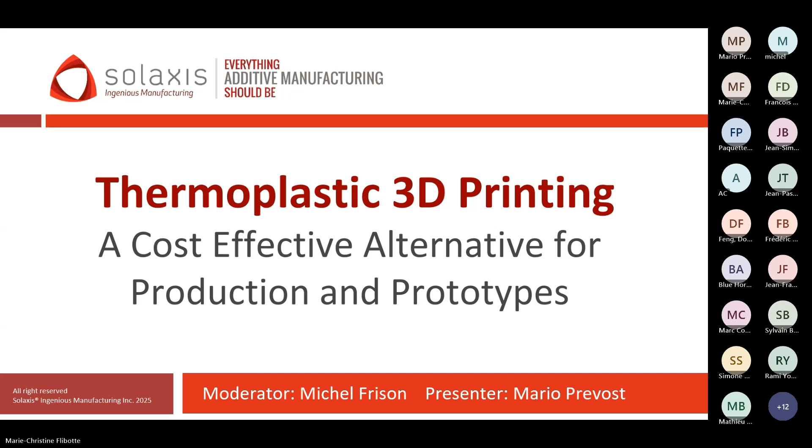Today, our aim is to provide you with a status of the industry and where technology is evolving. This first webinar will be very general, but future webinars will dig deeper into more targeted subjects. We are open to your suggestions for future events in the chat box on the right.

Today, our target will be the following: introduction of Solaxis manufacturing, the potential benefits of 3D printing, the state of the 3D printing industry in 2025, how to integrate and optimize 3D printing in your project, and at the end, we'll have a question period. Feel free to write your comments in the chat box and we will look at the questions at the end. Next slide.

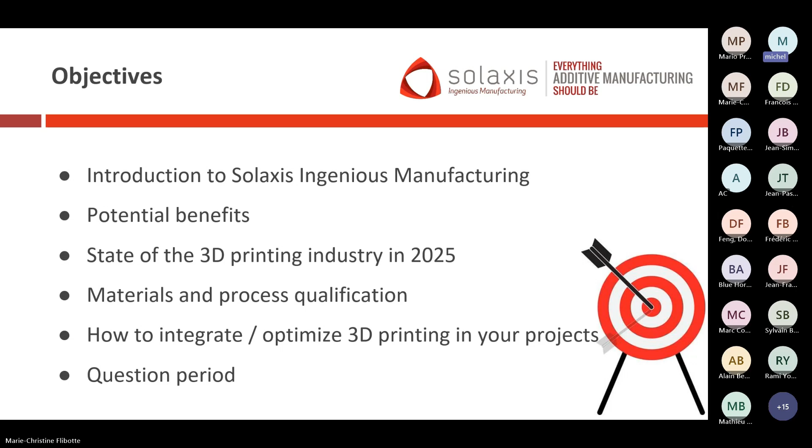Solaxis Ingenious Manufacturing was founded in 2010 and is located in Bromont, Quebec, about 1 hour south of Montreal. Solaxis is a leader in additive manufacturing of thermoplastic with worldwide industrial-grade technologies. Solaxis uses the following technologies for 3D printing: FDM, FFF, and high resolution SLS.

Solaxis is certified AS9100 and ISO 9001. We are also Controlled Goods Canada for our military projects, and CMMC. Solaxis works with various OEM and Tier 1 in the aerospace, medical, industrial, and transportation industries. Solaxis works with leading OEM, Tier 1 and 2 in many countries.

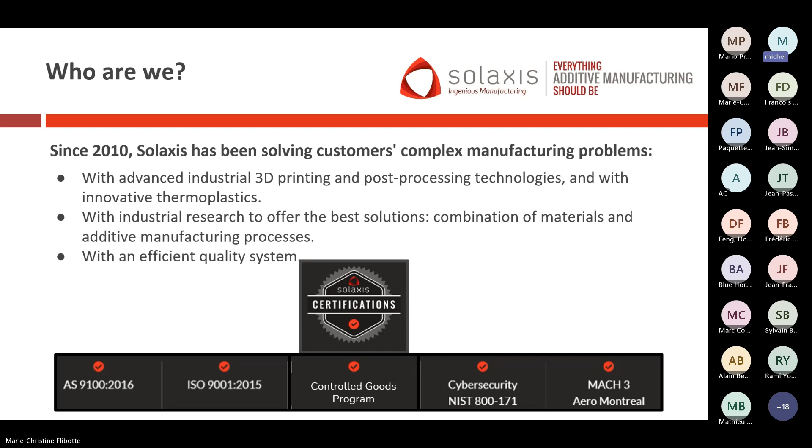Good morning, everyone. Thanks, Michel, for the intro. So today we're going to be talking about 3D printing. Basically, we're going to be tackling some different points about the envelope size, minimum, maximum, the volume, the type of material, lead time, tolerancing, and the benefits that can be brought with 3D printing.

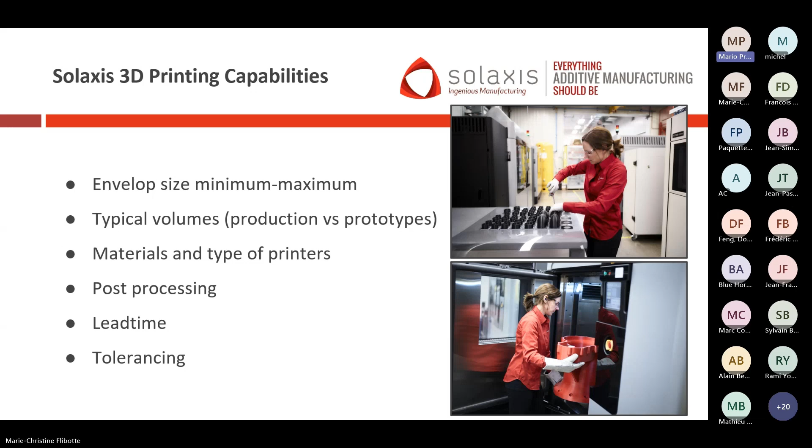So to start with, we're going to show you a quick overview of our shop floor. You can go to the other page. So that's just a quick image of the type of systems that we have. First of all, the FDM. We have several large format systems that go up to a 3 feet by 2 feet by 3 feet envelope.

Those types of machines have heated chambers, so they allow us to print parts with high-end materials such as Ultem and PEEK, and also a broad range of other materials with carbon fill and other fillers like glass fill. We can see in the image on the right side the finishing department and a portion of our painting room that we have here at Solaxis.

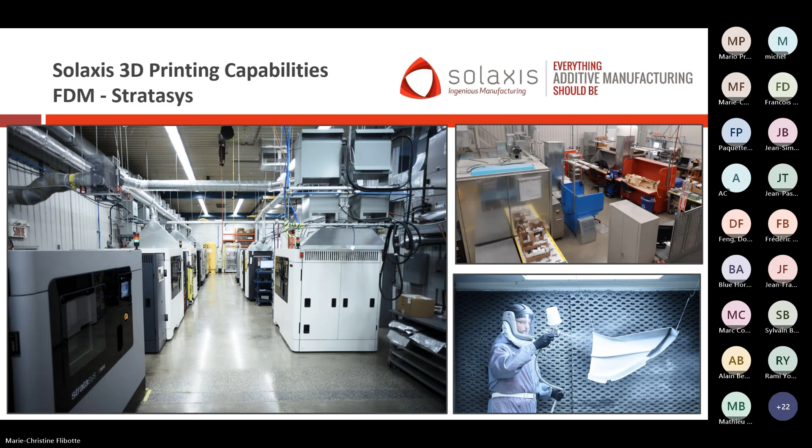So FDM is a large format heated chamber system with an accuracy of roughly plus minus 12 thou of an inch, depending on the size of the part and the geometry. They can go with different layer thicknesses from 5 thou of an inch up to 20 thou of an inch, which allows us to do basically filament 3D printing.

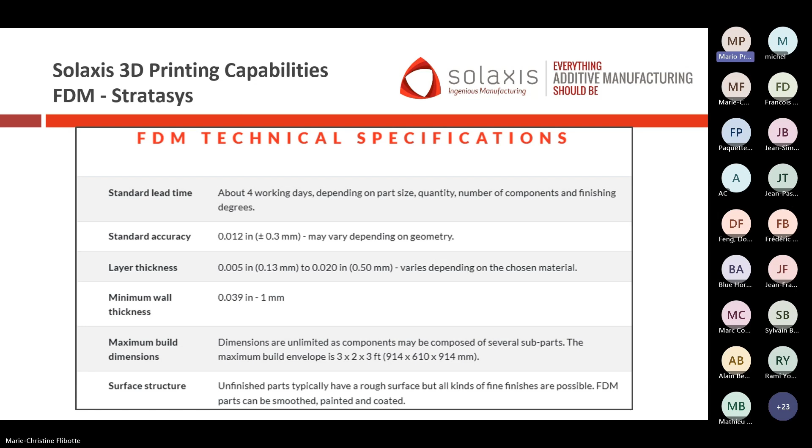At Solaxis, we've also added some FFF, so open source systems of different sizes. Some smaller systems, about 10 inches by 10 inches by 10 inches, up to a really larger format that can go up to 1 cubic meter as a size of prints.

Those open systems offer us the capability to use several types of material, mostly in the lower range, so PLA, PETG, which are materials commonly used in the industry for fit and form and prototypes. But we can also print other complex materials that can be carbon filled, glass filled, and flexible materials like TPU and TPE.

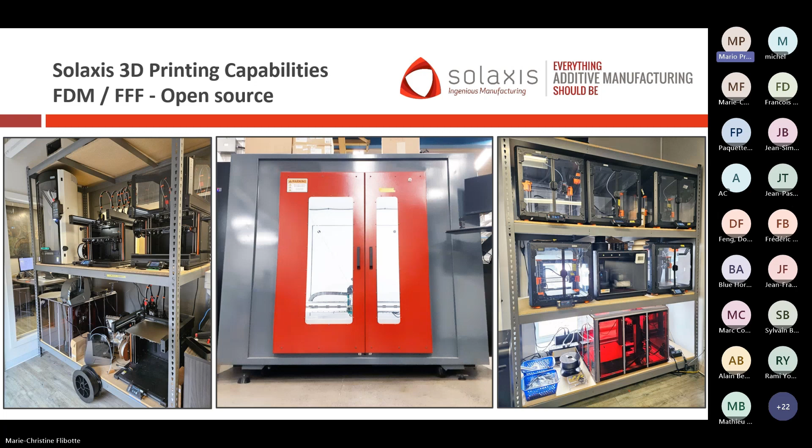For these types of systems, the smaller ones are quite precise and can achieve some thin walls. But for the larger format, since the machines are up to 1 cubic meter, the tolerancing is a little bit broader, and the layer thickness is also greater.

In the larger size and FFF, we also offer the capability of printing with pellets. That system allows us to print a really large format part faster with less resolution, but still capable of printing a large volume and a large amount of material in less time.

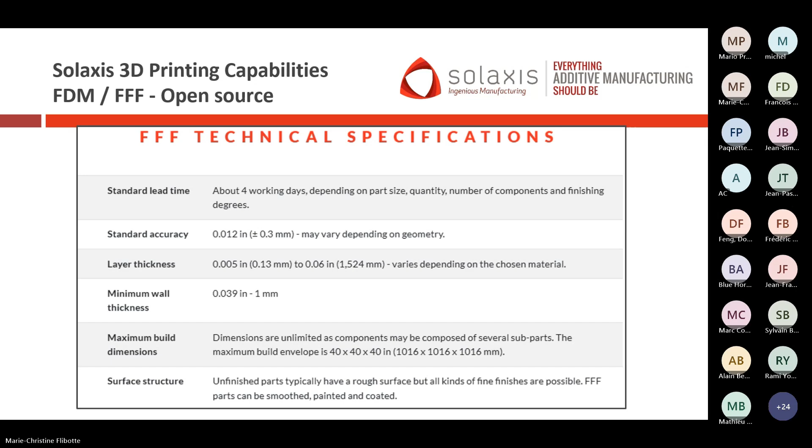The other technology that Solaxis also offers is SLS. SLS is selective laser sintering. It's a powder-based system, in which a laser comes and sinters the powder. The SLS that we have here at Solaxis allows us to print some parts. We've taken the decision to go with the PA11 material, so mostly polyamide.

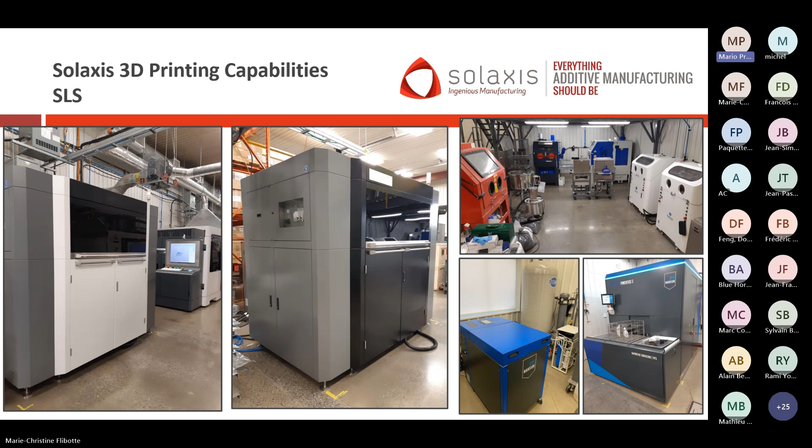One of the main goals of the SLS technology is to go with a higher volume of production, to be able to do nesting and to have parts that have a better surface finish compared to, let's say, filament printing. One of the things to consider with SLS is if the parts are designed like for injection, with more uniformity in the wall thickness and in the geometry, that's going to bring a better result.

Also, the fact that it's a powder that's laser sintered allows us to get a smaller layer thickness and more detailed parts. And the SLS can be post-treated with a forced vapor deposition system that is capable of sealing and smoothing the part automatically and brings higher mechanical properties with this type of post-processing.

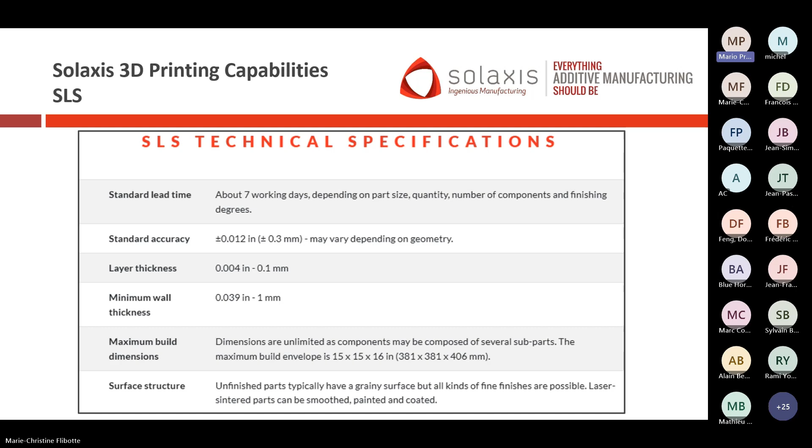So for some potential benefits of 3D printing thermoplastics, some of the main benefits would be the cost reduction compared to certain standard processes like molding or machining for lower volumes. Also, it allows us to increase the design-to-market capability by reducing the delay.

One other benefit of 3D printing is being able to consolidate parts from an assembly. That way you reduce the number of components. But at a certain point, there's a maximum gain. If you combine too many parts together, you might have a loss of improvement. So it's about finding the right amount of consolidation.

3D printing also opens the world of design, to be able to have features that were not possible to produce before, or that were difficult to produce with the standard or most commonly used production methods.

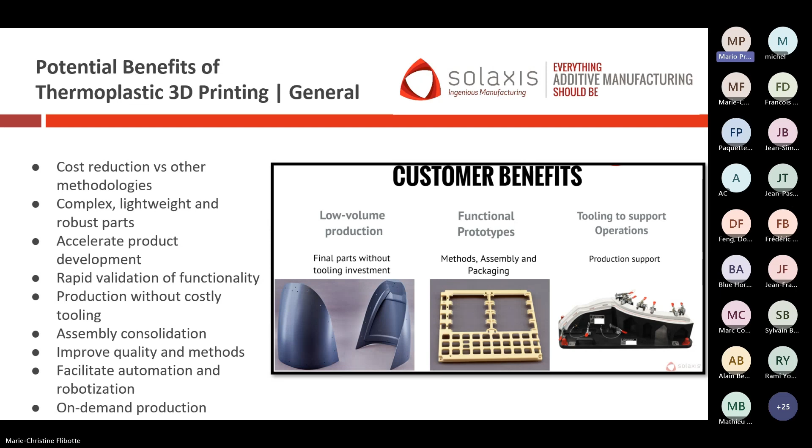Since a lot of people present here today are in the aerospace industry, here's a quick overview of some benefits of 3D printing in aerospace. For design optimization and weight reduction, we've seen a lot of advantages for our customers. Also, there's no tooling required. If you have a lower volume of production and you don't need to design and produce tooling, 3D printing is going to bring the part to your facility quicker compared to other regular production methods.

A few examples would be galley components, ductings, shrouds. We've built components for customers that were going into seats for aircraft, cockpits also, and even tooling. Tooling that's going to help your facility do MRO, so maintenance, repair, and overhaul, that can help do some assembly in-house or even protect other surrounding components while you're doing certain tasks in the aircraft.

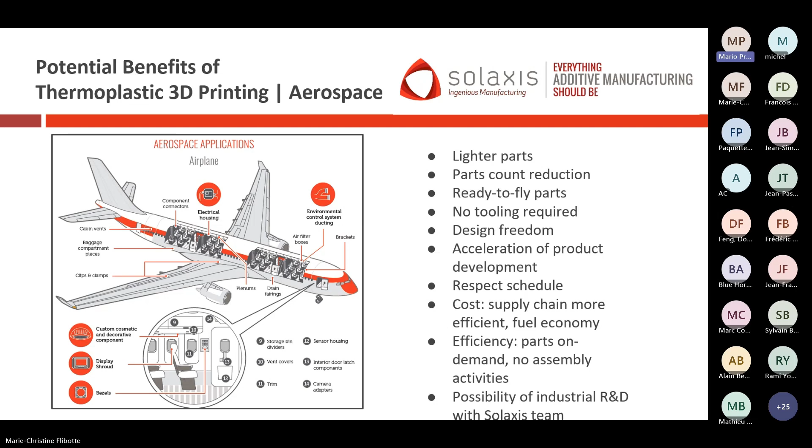I can give you a quick overview of the state of 3D printing in North America. We've seen growth throughout the years of 3D printing in the market, and according to different evaluations, we see a potential growth of roughly 22% in North America for the 3D printing market between 2024 and 2030.

This growth is on all the different technologies that are available. We see SLA or stereolithography, FDM, inkjet printing, PolyJet, selective laser sintering. Those are all different technologies that exist on the market at this time and that have different growth, because people are more and more using 3D printing in industry as they see benefits, and they can explore and push further the limits of 3D printing to develop parts, develop components, and increase productivity.

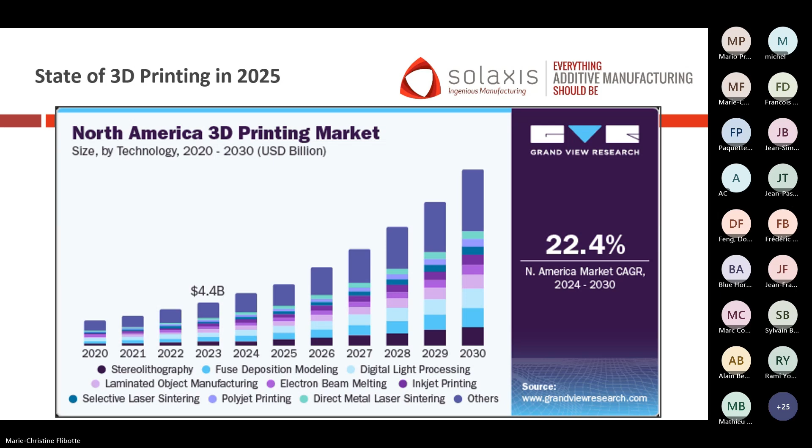With this growth, we see a few materials that are coming into the market or that are growing or taking place in the market. To give an idea, the most common material that we can see is polyamide, so nylon. That takes roughly 50% of the market.

So the nylon, why is that material so popular? It's because basically it's mostly used in the SLS or MJF for powder bed fusion printing, and also it's available on the filament side for FDM and FFF.

So they come in various forms, either powder or filament, and they can be filled with carbon fiber, carbon nanotubes, and also glass beads. It can be nylon 11, nylon 12, or nylon 6. Those are different types of polyamide that have different mechanical properties or different applications, used also for automotive and other types of industries.

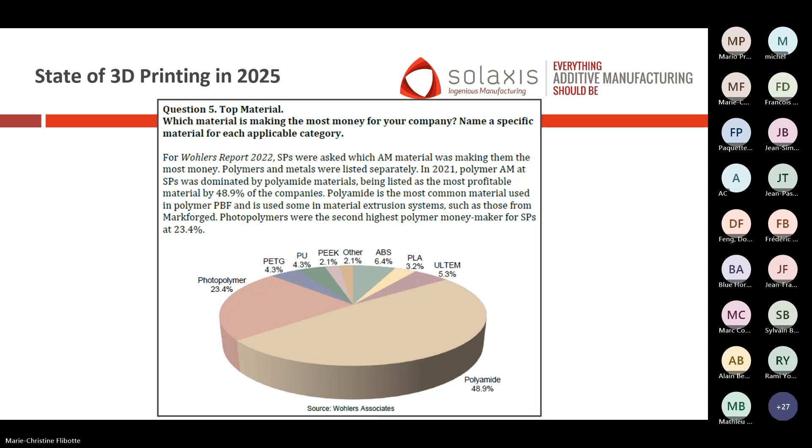For example, some patents that expired on the filament side brought up a lot of companies that developed open source machines. So from PLA, ABS, even machines that now go to higher temperature and high-end materials. On the liquid side, there are a lot of systems for vat polymerization, which is SLA or DLP.

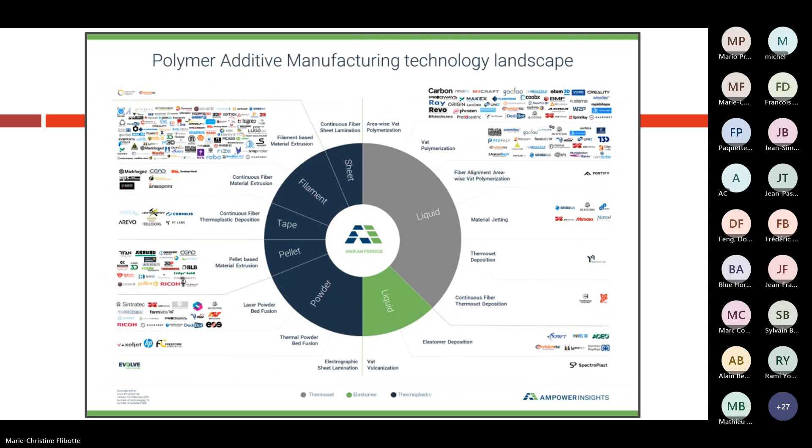So we're going to see a quick comparison between the three most commonly used technologies. We have FDM or FFF, which is filament-based, SLA, which is resin, and SLS or MJF, which is powder-based. On the FDM and FFF side, the key differentiation is the high-temp application for FDM, and for FFF, the possible size envelope.

On the market, there are many types of systems, from smaller sizes that people can have in their own house, in their living room, for hobbyists, to higher-level production like we have here at Solaxis for high temperature. And there are even systems available on the market now for really large format.

SLA, which is vat polymerization of resin, brings a very smooth surface and excellent resolution for the parts. One of the downsides of SLA is that the resin is usually more affected over time by UV, so parts can be more fragile and brittle. For sure, a lot of materials have been developed over the years, so the properties have changed, but that's what we see mostly in the market for SLA.

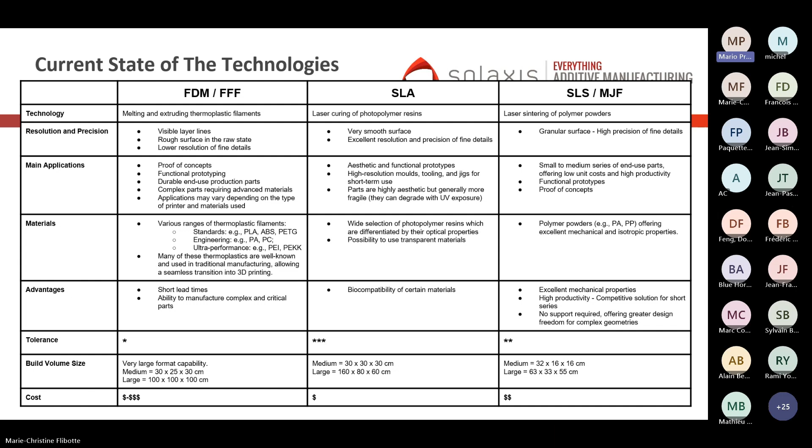Just a quick overview of some emerging materials. Basically, there are two big families: amorphous and semi-crystalline. We won't go too deep into those today; that could be a nice subject for another webinar. But basically, the amorphous are mostly the standard materials that are not going to be changing throughout the processing, while the semi-crystalline are going to be affected more by, let's say, the cooling or the temperature of processing.

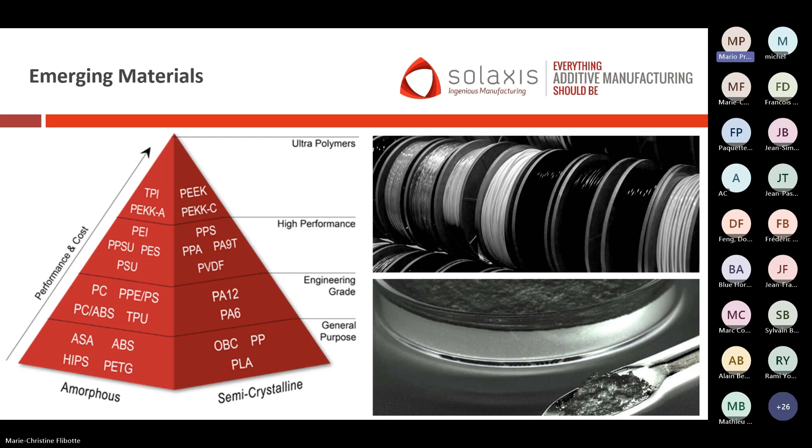What we've seen in application and material: there are a lot of new materials or new requests coming up because of the development with different manufacturers. So there are a few popular materials with higher demand, especially PEEK: high grade material, high temperature resistant, and excellent chemical resistance. Ultem, which is a big runner for aerospace applications, and also all the types of industries that need material that's going to be flame retardant.

On the reinforced side, there are a lot of materials now coming up with carbon fiber and glass fiber reinforcement. Those were usually higher-end materials. Now we can see more entry-level materials like PLA, PETG, ABS being developed with those types of filler, which help to increase the mechanical properties.

TPU and TPE, which are flexible materials, are also more and more common. Those materials can be difficult to print with FDM or SLS, since they tend to warp a little bit more. But we see a nice market and development and requests from our customers to do sealing joints and parts that need a little bit more flexibility or elongation compared to standard stiffer plastics.

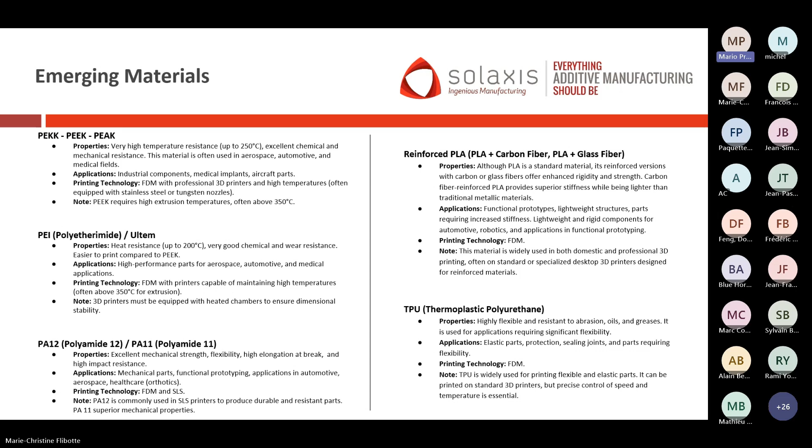On the other slide, we will see a quick image showing different applications or markets where 3D printing is used. We've got aerospace, defense, electronics for the ESD, EMI, RFI I was talking about earlier. Consumer products, end-of-arm tooling, robotics. On the healthcare side, we've seen a lot of emerging applications in the past years; a lot of companies now have developed materials that are suitable for healthcare and biocompatible. On the industrial and transport side, those are commonly used now for prototypes, jigs, tooling, and end-use parts also.

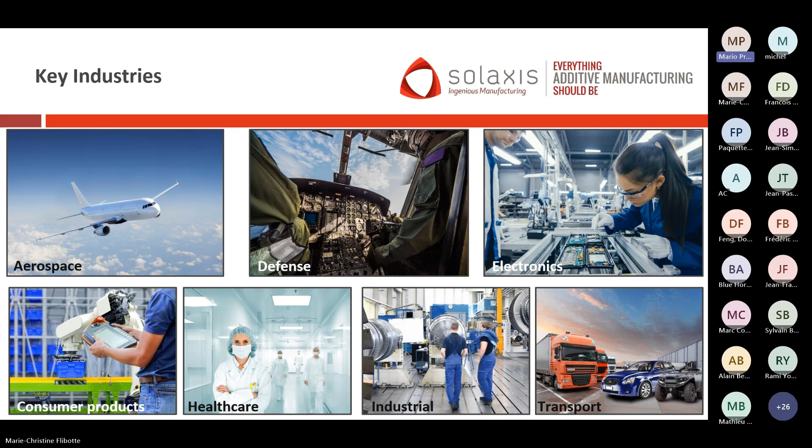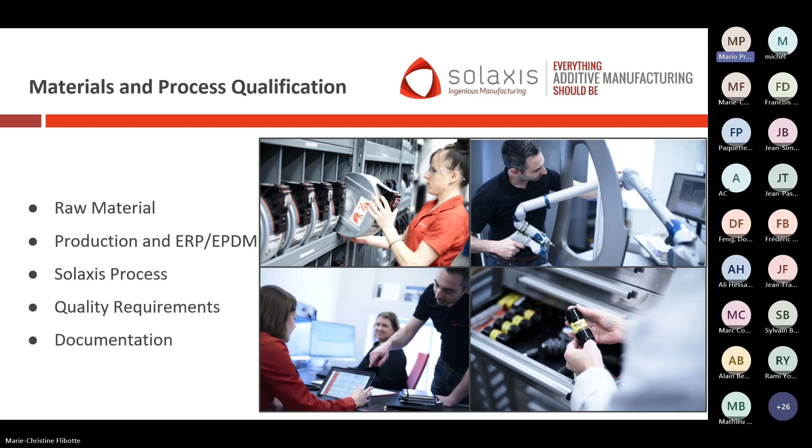And that's being done, yes, with the IT, but also with the process qualification comes the material testing to ensure that we have the right mechanical properties. So we're going to see on the next page some equipment that we have here at Solaxis, or that can be used also by different manufacturers and different suppliers for the material testing.

So we do the testing of the material to ensure that we have the proper composition. We can find the temperature, heat deformation, glass transition, but one of the key elements is the destructive testing. So for the destructive testing, we put a lot of effort on printing some coupons and validating if we're able to meet the properties that are on the spec sheet.

So traction, flexion, compression. And we've seen that depending on the process and the parameters, those can have a large effect on the results. So we do some testing, we validate, if we need to modify or adjust the processing parameters, we do those, and we do other testing to validate up to the point that we are confident that we can produce and repeat parts that meet the expectations of the customer and the properties that are advertised.

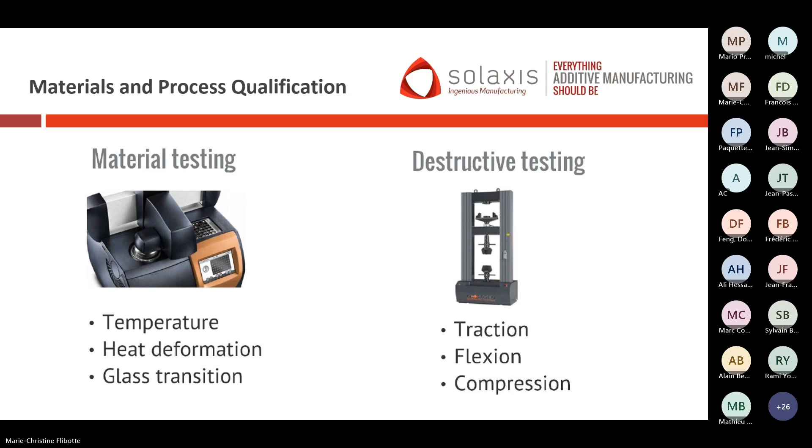So when it comes to adopting 3D printing in the industries, at the end of the day, there are some key points that need to be kept in mind. The first one and the most important one is to define one potential project. So if you're new to the 3D printing world and you want to try 3D printing, first of all, define the project, find a medium to complex part. If it's a new part, does it need to be redesigned? Is it a prototype, tooling, end-use part?

After that, you need to validate the needs. So what's the main goal that you're looking to reach? What do you want to achieve with your part? So if it goes to weight reduction, cost reduction, part consolidation, which I mentioned a little bit earlier, it's a little bit more complex for the consolidation because you need to find the right amount of parts that you want to put together, and sometimes it's going to need a little bit of redesign to maximize the 3D printing gain, or to use 3D printing properly and not simply combine parts together that came from another process before.

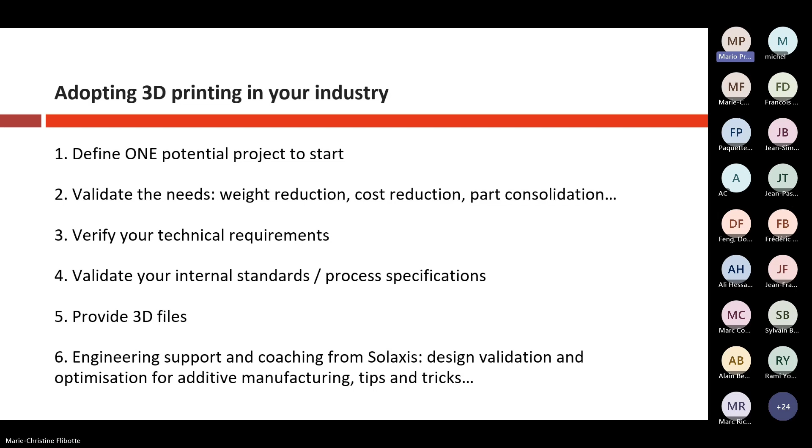So that brings us to the Q&A section. If someone has any question, please feel free. If not, we have some questions that we've brought up. All right. Thank you, Mario. It was very interesting. This technology is evolving every year, every month, every day. There's new stuff coming out, which is very interesting. We have a first question here from Monsieur Bret.

I think you're muted. Yeah, I was double muted. Sorry about that. Salut Michel. Salut Michel. Thank you for the presentation.

Very interesting indeed. You mentioned a couple of things about process qualification and mechanical properties. It's always been the challenge with this process for us to have guaranteed mechanical properties to make our analysis when we design a part. So where are we now? I know that NCAMP is working on developing an industry standard for process qualification and material qualification. Are you following that, or are you using your own internal process specification when you mentioned qualification? That would be a first question. And also, are you strictly doing build to print, or are you also doing some design and build for the aerospace industry?